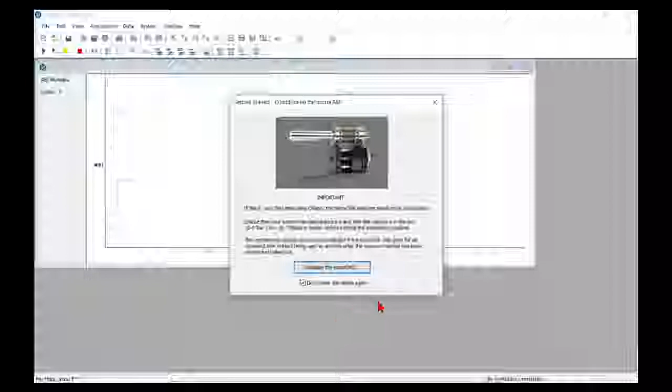We can simply select this here and say don't show this again after it first turns on. But what it does is it stresses the importance of doing the initial outgassing and conditioning of the electron gun. So we'll turn this off. Okay, close this down. Now I have to exit the program again.

So step one, I will turn on the MicroCMA controller, wait a couple seconds for Windows to find it, and then double-click again CMapp to open the program. This time we didn't get that message, so that means that the controller is talking to the software. Okay, so that's the initial turn on.

Okay, now depending on which version of controller you have, you may have to set the emission offset. And so to do that, we open up the hardware properties dialog box and see the emission current offset here is set to 0 microamps. Okay, for this controller, that's correct. For other controllers, that value might be 0.75 microamps or 0.65 initially.

But here's what we want to do. So I've got this set to 0. I'll say OK. I open up the electron gun dialog box, turn my beam on to 2 kV, turn the filament on, and you see this microamps here and how that drops down? That's the leakage current on the high voltage module, and it takes a few seconds to stabilize. And so it looks like I have a little bit of an offset of 0.0015, 0.0014. So it's just slightly above 0.

So what I could do in this case is I could shut this down, come back over here, and set my offset to 0.0014. Okay, now let's turn on to 2 kV, filament on, watch this drop down, and now see that's closer to 0.

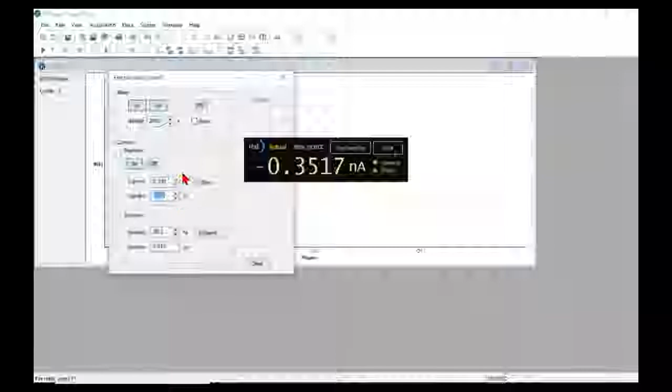Also, here's another little thing we'll set up right now as long as we're here. I'm going to go ahead and drop the filament current down a little bit to where we don't quite have any emission. So now I don't have any target current. See, that's dropped off to pretty much nothing. That's 0.747. So let's put the standby at, I'll say 0.75. Yeah, that's pretty good. Okay, so that's right on the edge of where it starts to emit.

So now see if I take this back up to about 0.9 or so. Here's our current. If I go standby, current goes down. Also turn the beam voltage off. Go turn that off. Now it'll go from the standby back up to 0.9 amps, and the current should come up in a few seconds as well. Oh, I see. Let's drop this down. There we go.

Now, as long as we're on this menu here, another thing we can do is once we find the optimum point for the Wehnelt at 2 kV, so if I lower this down, see my target current is dropping. If I increase a little bit, target current's coming up a little bit till it peaks out right about there. Now I hit set point. It says set the 2 kV Wehnelt to the value I have right now, and I'll say yes. So that means that at 2 kV, the Wehnelt percentage will be 38.4, and that should be the correct value to give us the maximum current density.

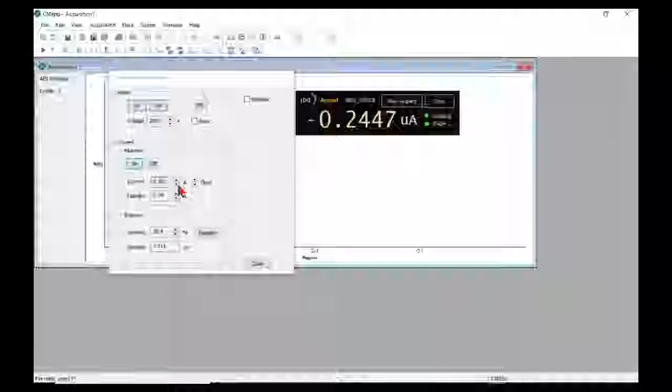Okay, so what we've learned really is that we want to set this current to about 0.9. Let's use the fine here, get it up. I'll say 0.9. Okay, so let's remember that, 0.9. So we'll go ahead and turn off the beam, turn off the filament, close, and stop sampling.

This section of the video, we're going to talk about the conditioning. So we'll go here under System, Conditioning, and these three dialog boxes, what they do is they deal with ramping the filament up, ramping the beam voltage up, and ramping the multiplier voltage up. And so remember that value that we set to, it's already set here at 0.9. We found that that turn-on value was 0.9 amps. That's about where we want to operate.

And so here I can initially set the filament to turn on starting at 0 and going up to 0.9 amps over 20 minutes. Let's raise that up to, if this is your initial outgassing, you're going to want to go 30 to 60 minutes. Bring it up more slowly. Let's say 30 minutes, okay?

That's fine. Now let's say, for example, if I wanted to change this value, let's say it wasn't 0.9. In order to change that, see it's still grayed out? I can't change that unless I first turn this filament off up here. Now I can change that. So let's say if this was down at 0.888 and I want to take it up to 0.9, bring it up to 0.9, say filament on.

Okay, filament on here. Now the beam voltage, you can start it at 0 if you want to, but 500 volts is really quite low. So I'll start at 500, and then we'll go all the way up to 3,000 volts. And then we're going to take this up, especially if it's an initial outgassing, after you've baked out and you've installed the thing for the first time. This is your first conditioning. You're going to want to give it some time. So I'd go a minimum of 120 minutes, but even 180 minutes.

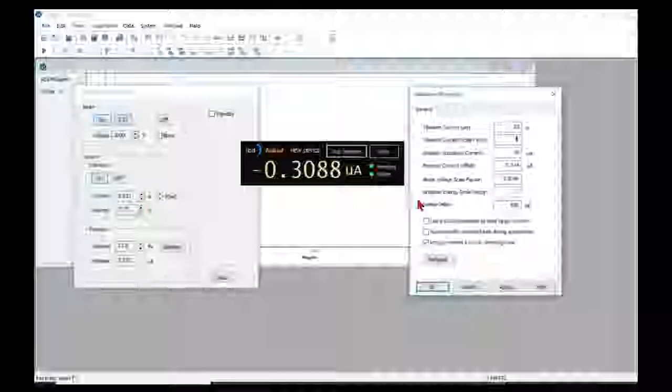So initially I'm going to set it to 0.93 in this case. That way if I accidentally run this thing up too high, I'm not paying attention and get distracted, or sometimes the mouse just runs away from you, we're not going to go way too high to where we damage the filament. Let's run this up that high and see how much filament current it gets us. Oh, I have to apply that first. This should stop at 0.93 now, and it does.

And see, that gives us about half a microamp, so that's not a whole lot of current, so that's relatively safe. If you wanted to go higher, get a microamp, you'd have to bump up the current limit a little bit, but we recommend operating the gun at about 300 nanoamps of target current. That gives you a good value where you're not causing too much heat damage to your sample, which can cause carbon desorption and adsorption effects, and also reduces the chance of arcing because you don't have a lot of outgassing happening in the electron gun region. But you can run it up to a microamp or even a couple of microamps if you want to.

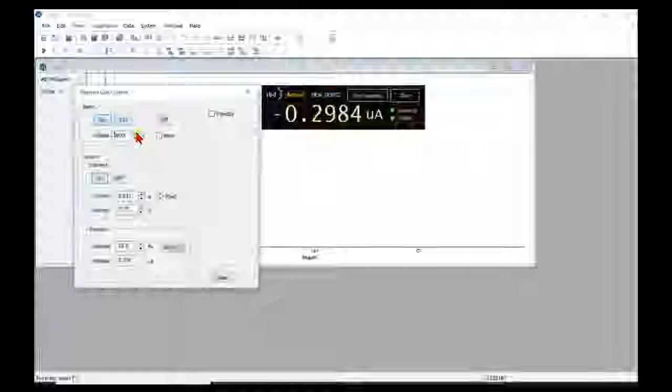Okay, so there we go. That's pretty stable. So that's basically setting the filament current. Now, as long as we're here, I'm going to show you how to optimize the Wehnelt. We did it here. I'll hit that set point again. It says yes for 2 kV. Now, since this gun has already been conditioned, we can run it up pretty quickly to 3 kV. Okay. Now, see, the current is actually a little higher.

Let's adjust our Wehnelt here to maximize it. Oh, that's nanoamps. Okay, I've got to come down. I was looking at picoamps and thinking it was nanoamps. Let's drop down. See, I'm bringing the Wehnelt down. See, now we're up to about 250, 260, 270 nanoamps, 280. Now I'm going to just keep clicking this a little bit until it peaks out. It should peak out fairly close to the 300 nanoamps that we had at 2 kV. Okay, there it is.

Okay, see how I did that? So now I've got that optimized. I hit set point. It says change it to 3 kV set point to this value. Yes. Okay, now if I go to 2 kV, we should have about 300 nanoamps.

And if I run up to 3 kV, all the way up, you see how that's staying nice and stable at 300 nanoamps? Oops, gotta hit it. There we go. So what we've done is we've just set the slope of the Wehnelt voltage so that now no matter what voltage you select, we're always going to have maximum current density and smallest spot size to the sample. All right, that is called setting the Wehnelt slope. Turn this off, stop this.

Boom. See what happened? We went over 5. It said the emission reading was over the limit, so what it did is it shut down the beam voltage and current circuits. It shut it off, and we don't have any current over here. So that's another level of safety where you can set the emission current limit so that, and see, it automatically shut everything off.

So let's go back to our dialog box here, and since that's really just an upper limit, okay, I'm going to set this back to the 0.93 that we had it set to. I'm going to put my emission current limit up pretty high, like 19. Okay. And apply. Okay. Come back, turn our beam on.

Filament on. Measure the current. Target current, that is. Bring up the filament current. Okay, slow down a little bit here. And there we are, coming back up, and it'll stabilize fairly quickly to that 300 nanoamp value. Okay, so that is setting the emission current limit.

Okay, so for this section, we're going to calibrate the elastic peak position and also the energy linearity. So I have a piece of copper loaded in. I've been running this gun, letting it warm up for a little bit, so now you can see up here I'm dropping it down to about 300 nanoamps of current. Okay, stop sampling. So this little alignment icon over here is for the elastic peak, or you can also go over here and go Acquisition. Technique is AES, of course.

Oh, we'd have to go File, New to get that to open up. New alignment. Okay. Acquisition. New alignment. We can get to it here as well. All right. So that's one way to get to it. I like to also just hit this little icon up here, New alignment. So we hit the green Start, which will go ahead and set things up. It'll automatically ramp the multiplier voltage.

And I've got the sample position about 3 or 4 millimeters away from the CMA and sample distance. So now I'm going to walk over here and adjust my Z translator. And you notice I'm not at 60. At this point, I don't care where it's coming in at. I just want to try to find the maximum counts.

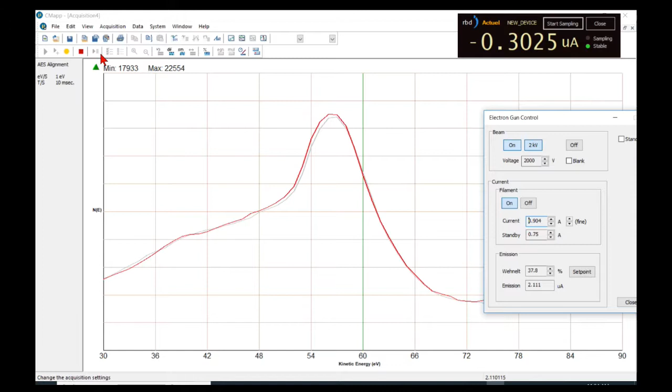So on the front panel of the controller, I'm going to unlock the offset knob and I'm going to move that pot a little bit, and it's very sensitive. So what I'm going to try to do is find a spot. That's pretty good. Lock that down. Okay, when I locked it down, it moved a little bit. Let me go ahead and differentiate just to see where that peak is. That's pretty good, pretty close to 60. Okay, let's stop this.

Okay, that's a pretty good initial value, but really what we want to do is set this with the beam at 3 kV to get more of the higher energy. So I'm going to run this up to 3 kV, my beam voltage, and let's check that again. So hit the little green go button, hit the yellow button, then it'll save it. Oops, I didn't want to do that, I just wanted to stop it. Okay, smooth and differentiate. Okay, that's pretty good.

Now we're going to change the parameters. So we want to look at the 920 peak differentiated. So for there I'll go from 900 to 940. All right, acquire. Now for this high peak, we're going to adjust the gain pot on the front panel of the MicroCMA controller. And for this I want it to come in about 916, 917, something like that.

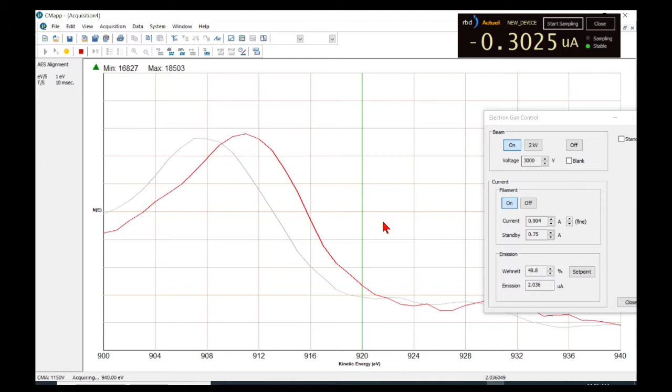Okay, that's low. So I'm going to loosen that and I'm going to turn this a little bit counterclockwise. All right, let's differentiate the data and see where that peak comes in at. That's pretty good. Okay, so I'll lock down the front panel pot. Okay, so now we've set those two peaks. We've got the low-end peak and the high-end peak set.

We'll come back to our settings, and I'm going to go back to the 2 kV elastic peak settings and acquire the elastic peak again. Now, if the peak is not exactly at 2,000 volts, we're going to adjust the beam voltage reference to set this to come in. Oh, this is a common mistake, so I'm glad I did this. So let me stop this thing here. If I'm going to do the elastic peak, I've got to set the beam to 2 kV first. Okay, now reacquire. So if you see that slope during an elastic peak going up like that, that means your beam is at 3 kV.

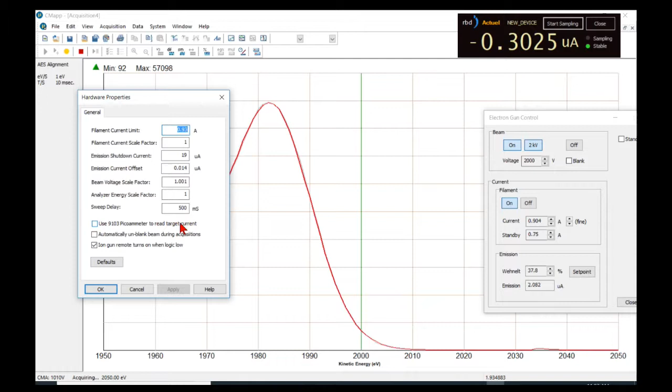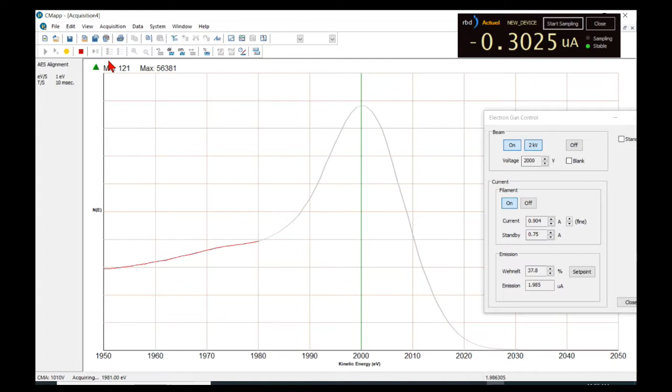Okay, that's pretty good. All right, so now we're going to go ahead and say OK to save that. Yes. All right, now what we should see is we can go ahead and stop the alignment. If I hit the red button, that means I don't want to save it. If you hit the yellow button, that means yes, I want to save the data.

Let's do a survey. 30 to 1030 eV. You don't want to start at 0 because there's so much low energy down there, it's going to skew the scale. So never go really below 30 eV. You're not going to get any useful data by going below 30. And so we set the upper limit to 1030 just so that it's even increments. 10 sweeps, 25 milliseconds. This is pretty typical.

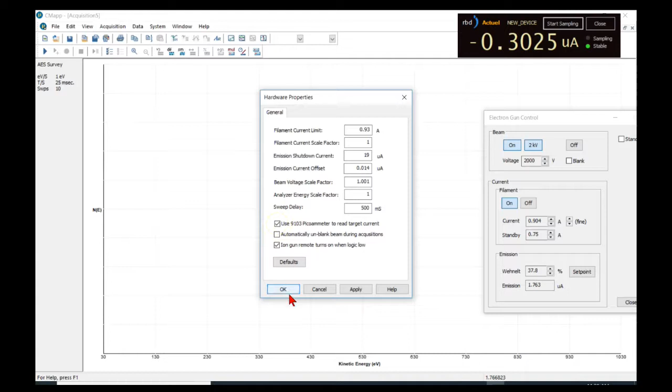Before I do this, as long as we have Actuel set up here, there's another feature we can set here. I'll go ahead and apply this. Here it says use the 9103 to read target current. So I'll say OK, apply, OK, close that down. Let's sample for a second here, just make sure. Yeah, it's pretty good. It's pretty stable. Drop it down just a tad.

Stop sampling. Okay, now when I do my survey, hit acquire the survey, it will start out initially and watch what happens up here. It's going to go ahead and turn it on and off automatically. There. So the CMapp program went out and talked to the Actuel program and said, hey, what's my beam current? And so it recorded that. It won't display it here, but when it gets done with the end of the sweep, it's going to display the current. So that's a useful feature if you want to save the current when you're taking data. And it's very important when you're comparing one sample to another to have the same current conditions.

Let's go back to the hardware while this is running. And so current, scale factor, oh yeah, I was going to show you this. If you turn this off, if you're not measuring with the 9103, you can still manually type in the current that you took the data at.

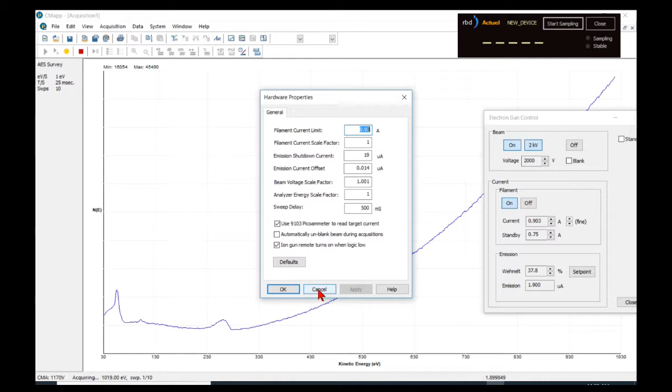Okay, so now you see I'm taking this data with the beam at 2 kV. Normally, you don't want to take 2 kV. 2 kV would be useful if you're having a charging sample or something, but you always want to take survey data at 3 kV. So you see how big this peak is here, the upper end peak. As a general rule of thumb, you want to have your beam voltage be 3 times higher than the energy that you're scanning. And that's why with the MicroCMA, we have a 3 kV coaxial gun, so the typical range is 30 to 1030. You can scan up higher to higher peaks, but realistically, if you get up to like 1500, those peaks aren't going to be as large.

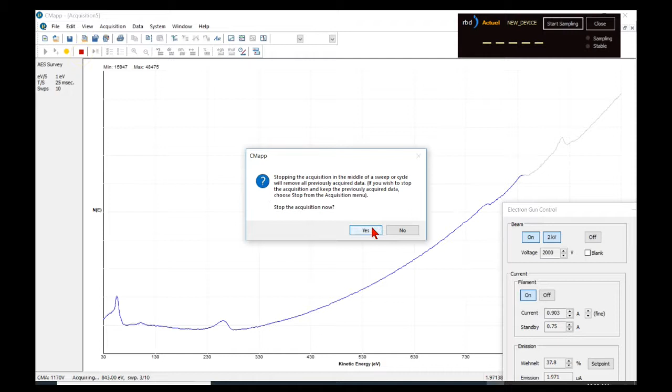So what I'm going to do is stop this right here. Say stop, yes. I'm going to run my beam back up to 3 kV. Okay. Now let's go ahead and acquire. So at 3 kV, that upper energy peak is going to be much higher because my beam is now higher. It was only 2 times higher than that peak when I had the beam voltage at 2 kV. With the beam voltage at 3 kV, that peak's going to come up. So this is the low energy peaks, some carbon.

Now, one of the reasons we select 10 sweeps and 25 milliseconds per point is you can see that you have some noise here, and then for each sweep that you take, that noise is going to go down. So sweep 1, you can see the peaks there, but there's noise. And so by the time you get up to 10 sweeps, that's going to smooth the noise out quite a bit.

The other thing that you notice is that there's a lot of dead space when you take a survey like this. So there are no peaks here, there are no peaks all the way up through here. These are all copper peaks. That's a copper peak, nothing up here. And so in that case, what you'd like to do is take a multiplex. Because with the multiplex, you can take a scan and you can look at just this high energy copper peak here and just the carbon, for example. So you're not wasting all that acquisition time taking data where there's no data. The handbook data, of course, is usually taken over a survey. So if you're going to want to compare something, you'll do a survey.

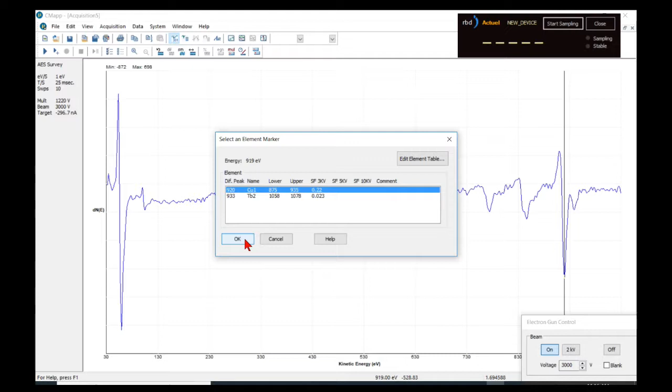All right, so now I'm going to smooth the data, differentiate the data, and show you what the marker does. If I slide the marker out here, what you're looking at is down here, at the bottom of the peak where that line intersects. It pulls up the element table and finds the closest peak to where the marker is, in this case copper, which is correct, and this should be carbon down here.

Okay, and now those are really the only 2 peaks. See, these are all copper peaks, and so now we can do an atomic concentration. Let me turn the marker off up here. This little thing here with the percentage is atomic concentration, and now we can see that the ratio of carbon to copper is about 30% carbon.

So the sensitivity of carbon is much lower basically than, well, I guess it's much higher actually than copper. So here we go. That's our copper, and it shows that the peaks are in the correct position, and we calibrated the elastic peak alignment. So that's setting the elastic peak and also adjusting the linearity on the front panel.

Once those are locked down, you don't have to touch it again. But it's very easy to change that. So anytime if you're not sure it's right, if you check something and you think one of your peaks is off a little bit, it's very easy to readjust that linearity offset and gain.

Okay, in this segment we're going to move over to a different sample. So I'm physically moving my specimen stage over to another sample that I think is silver. So anytime you move your specimen stage or your sample position, you have to take another elastic peak. So I can reuse the same AES alignment, 1950 to 2050. That's our elastic peak. Our beam voltage is at 2 kV. So we'll go ahead and acquire.

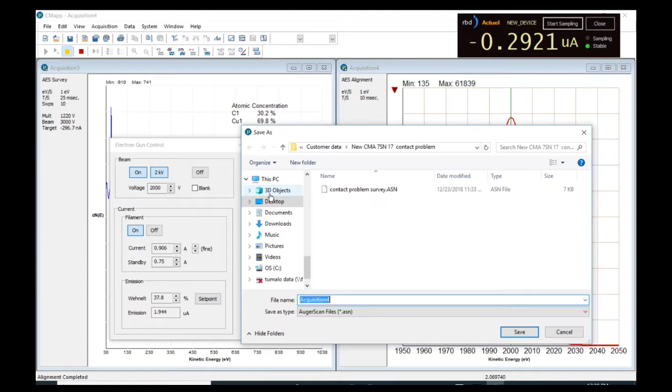You see where this is popping up, this thing that gives me a message that says save. You can set that up under the acquisition options. It says prompt to save after acquiring. If you have that selected, every time you do a survey or any kind of data acquisition, it's going to say save. That reminds you so that you don't overwrite a file and you give it a name. You can also automatically export out to ASCII if you want to.

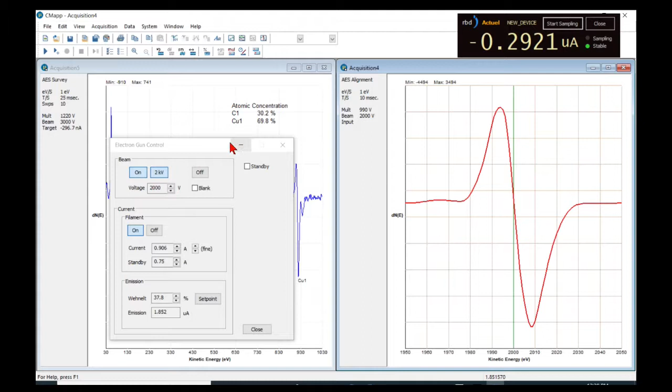Load previous settings for multiplexes and depth profiles. I would recommend that you have that loaded. Okay, so let's differentiate our elastic peak, smooth it. Okay, that looks pretty good. Let's do a survey. So again, we want to do surveys at 3 kV.

So let's start sampling. I just came back from lunch, so I had to turn this back on, and looks like it's starting to stabilize. Okay, let's run our beam voltage up to 3 kV. Okay, stop sampling. Come over here to our survey icon, new survey, and we'll go ahead and acquire.

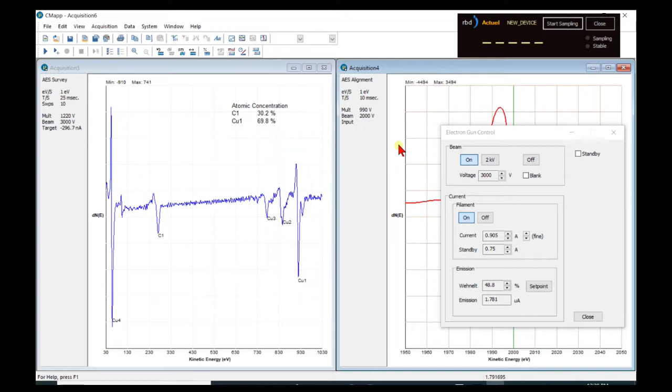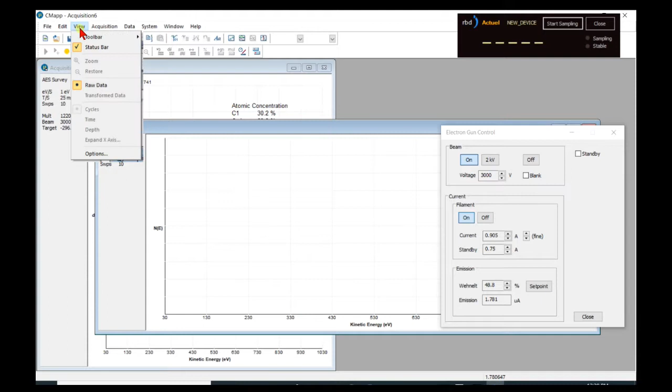I'll minimize the elastic peak and then go window, tile vertically. So here's our copper data. I'll now move the electron gun dialog box over there, and this should be silver. Okay, that looks like silver. So we'll get a few sweeps of this, and we'll just see what this looks like. And then after this is complete, we are going to do a multiplex.

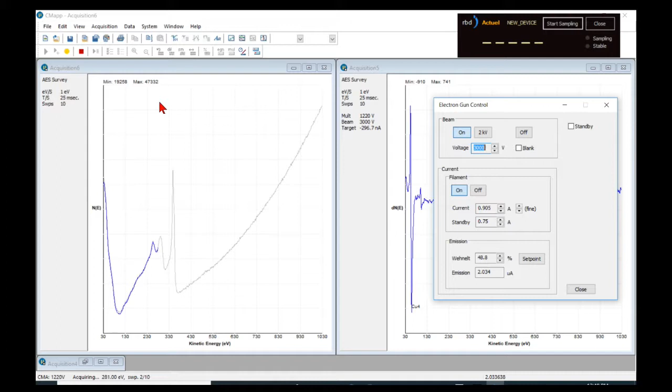You see where the maximum count up here is approximately 50, possibly 55,000, okay, 47 in this case. When the software sets the multiplier voltage automatically, what it will do is try to go to the upper end of the survey, because generally the background rises, and so the highest point of the survey is also going to be the highest point in terms of counts, and then it will set the multiplier voltage to be about 80% of full range, and that gives you a little bit of leeway. 80%, the maximum count is 65K, so therefore 47K is approximately 80% of 65K.

All right, so we can see the sensitivity for silver is very good, and that's why a lot of data is referenced to silver as a sensitivity factor of 1, because it's got a fairly large peak. Okay, we're going to come back to this after the sweep is done.

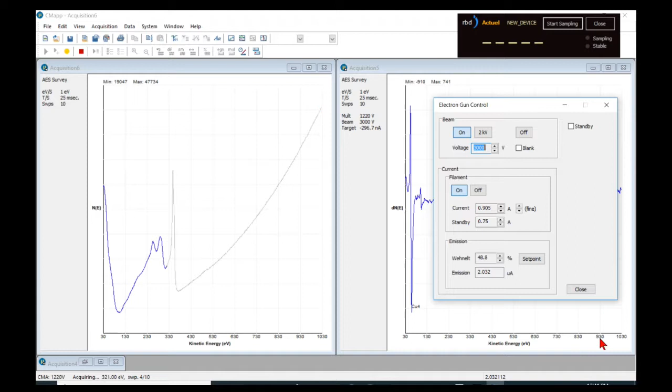Okay, so we're back after having acquired that silver survey, and you can see here, I've already marked it, but it's silver. By the way, if you select the marker track here, it displays the eV and the counts down here, and then that vertical line, if you click on that, the element table pops up, and it will tell you that it thinks it's this because that's the closest peak from the element table. Okay. Element table is located under Edit, Element Table, Auger.

And here's where all the sensitivities are for 3 kV only, and for all the different elements and the defined windows for the multiplex, lower and upper limit, and the sensitivity factors that you can edit. If you want to edit that, you just click on one, edit, and you can change the range, the eV per step, number of sweeps, and all that. That's the default for the multiplex, and here's the sensitivity factor.

Okay, and these are all fresh out of the PHI handbook. They're very similar to... All the CMAs have basically the same sensitivity factors. They're pretty close. I'll say no, I'm not going to save that.

Okay, so speaking of sensitivity, this is taken with about the same current, right? 296.7, 296.5, so very reproducible in terms of current. And you can see that silver, the signal to noise is better because of the sensitivity of the peak. It's got a higher peak.

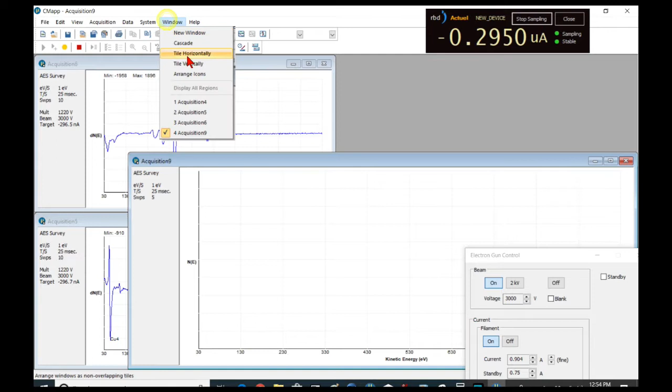Okay, so the elastic peak looks pretty good. We're centered. That's good. We'll stop the elastic peak. Now we want to do a survey. So I'm going to run my beam voltage up to 3 kV. I'm going to do a survey first just to show you. Let's get rid of this window here and do a new survey. And let's just do 5 sweeps so it's faster. Acquire. Window, tile horizontally. Okay, here's our survey.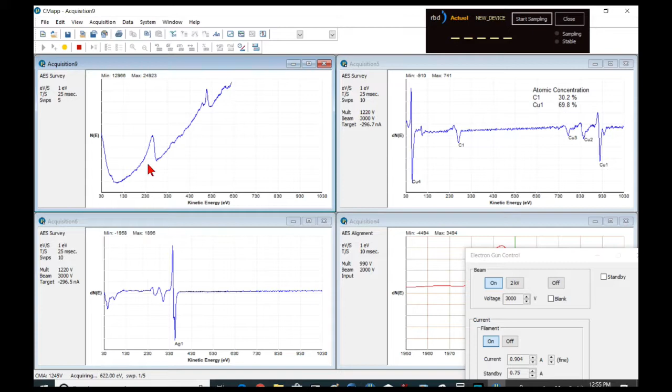So the point I want to make here is that there's going to be a lot of dead space where there's no data, and I expect that if we're on the sample mount it should be iron, so we expect to see some carbon, maybe nitrogen, oxygen, and also iron. Okay, so we can see that here we have carbon, and here's oxygen, and these are the iron peaks.

So the point is that if we look at the noise level here, of course the noise is going to improve with each sweep. So first sweep it's fairly noisy, second sweep the noise will start coming down as it averages out. But you see the height of these peaks out here, these iron peaks, relative to the carbon, they're much smaller. And it looks like we do have nitrogen right here.

While that's acquiring, I'll show you another little trick. My preference for the marker is, like I have it here, where it just marks and then when you click, the box will pop up. You can do it another way here, where you can go Data, Options, Display Marker while tracking. If you turn that on, now when you mark, you move the cursor, you see over on the left-hand side here, all the elements will pop up.

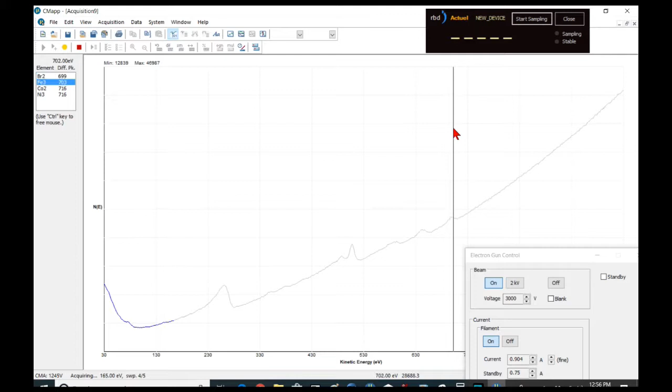And so if I want to go up to this peak and say, okay, I think that that's iron, see they're right next to each other, 702, 703. I know that's iron. This should be iron here. Yeah, it is. See, and this is another iron peak down here. There it is. So we can just confirm that that's iron.

You can set this up and leave it if you want it to be that way. My preference, though, personally, is I don't like that. I just find it too distracting, so I turn that off. All right, so we got one more sweep to go. Well, actually, we can stop this sweep.

I just want to make the point that if we just want to look at carbon, oxygen, and iron, we don't want to be wasting time here and here and here. And actually, that could be nitrogen. Let's see what that is. We'll go back and do it again. Data, Options. I'll turn that on.

Oh, silver. I don't think so, but that's nitrogen. Okay, so here's what we're going to do. We're going to set up a multiplex. So we can do acquisition, new multiplex, or you can also hit this little icon up here, which is new multiplex.

Okay, this is, by the way, loading the previous multiplex that we did. So I'm going to remove that. I want to add carbon, oxygen. I want to add nitrogen, I think I said. Oh, by the way, I can just type N, it will jump us right down to the nitrogen. Okay, add that. And okay, I'll remove that. I didn't want that element. And then, of course, iron. Type Fe, add. And I think Fe2 is the larger peak, so we'll take that one.

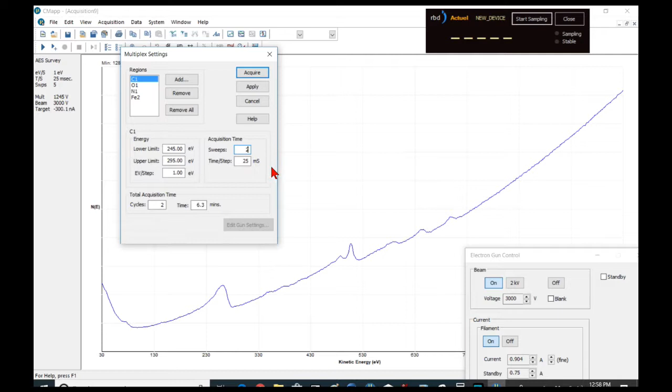Okay, so now what we have here is it tells us how many cycles, and how many sweeps over here, and the eV per step and the range over the peak. So the largest peak is carbon, so let's look at that. Carbon's got 10 sweeps. No, we don't need 10 sweeps. Let's take 2 sweeps on carbon. Okay, oxygen is almost as big as carbon, so let's take 3 sweeps on that.

Nitrogen is really small. This is it here. It's pretty small. Relative to that, it's a small fraction. And so if I went 2 sweeps there, I think I'm going to want to go 30 sweeps at least on nitrogen. And then on iron, relative to carbon, it's about 1/4. So if I went 2, that would be 8. Yeah, let's go 10 sweeps. All right. Number of cycles, 2. So this total time is only going to be about 3.8 minutes.

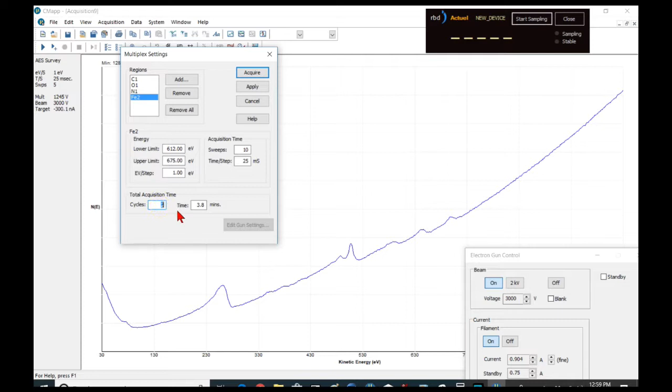So let me do this. That's not bad, just for training purposes. But I'm going to go ahead and set this to 4, because I'm going to stop the video, and then we're going to come back to it. Okay, I'll say apply, then acquire. As soon as it starts acquiring, up here we can see it's measuring the current for us again.

Okay, once that hourglass goes away, there, it automatically opened each window. So this is the first region here. This is carbon. Here's oxygen. Nitrogen. So we can see a little peak here, but as more sweeps go through, that noise is going to go down, and that peak's going to become resolved. Okay, I'm going to pause the video here, and then we're going to come back at the end of this multiplex.

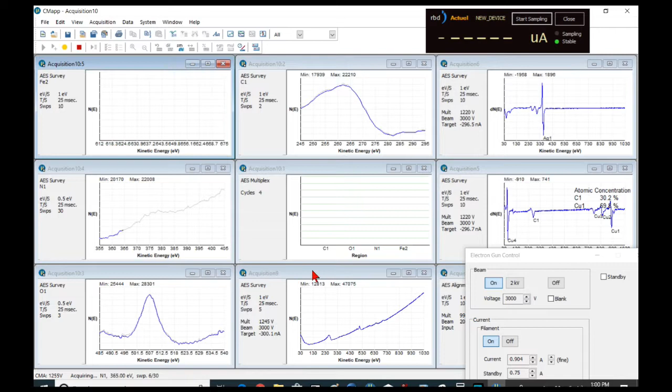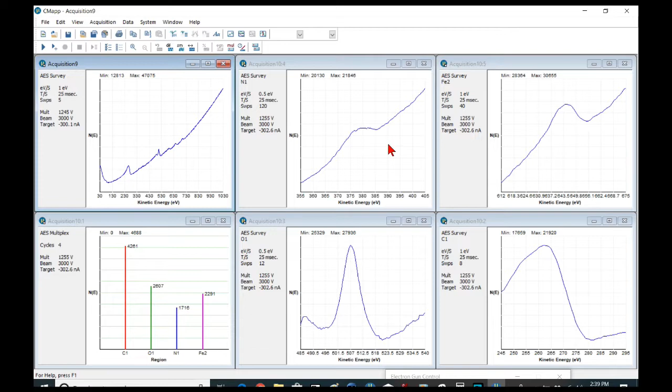Our multiplex has completed its acquisition, and what we're going to look at is some data massage options that we can do here. So I'll get the electron gun all the way down. Remember, this was the original survey that we took, and we can see here with just 5 sweeps that, yeah, we've got carbon. This, by the way, is a low energy iron peak. And carbon, oxygen, iron peaks, somewhat noisy. So what we did then is we took a multiplex where we're scanning just these regions here. Let me move this down, move this one down, go window, tile horizontally.

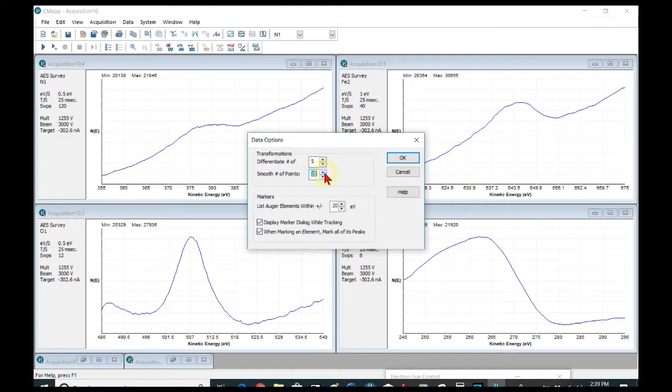Okay, so now we can see the nitrogen, which was barely even visible, after taking a lot of sweeps on it, 120 sweeps. We can see we have a peak. It's pretty good. Now, if I differentiate it, and then smooth, there's still some noise in there, even at that level. So one way you can get around that is let's revert. You can go into data options, and the default for smooth is 5. If I increase that value up to, say, 13, it's going to take an average over 13 points instead of 5. Now I can smooth it, then differentiate it, and see, it's not nearly as noisy.

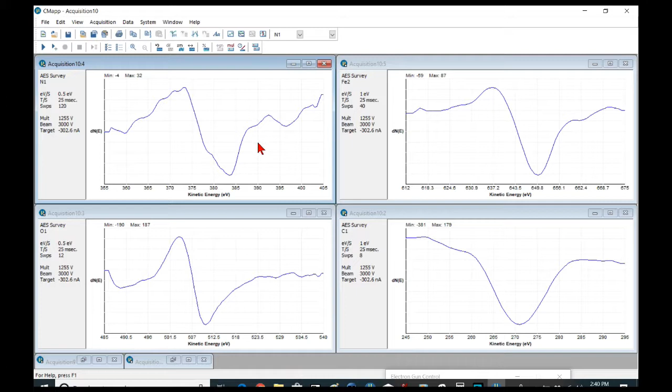The other thing you can do with multiplexes is determine the area of interest for the peaks, and to do that you select endpoints. So if I click from here over to here and let go, this is the maximum value and this is the minimum value to get the peak to peak that it's going to use for the atomic concentration. I can do the same thing on this peak, this peak, and this peak. All right, now let's blow up the other window here. Now that I've selected the endpoints and the data is differentiated, I can do an atomic concentration. And what this gives us is the percentage of those peaks.

So one new feature that we have is that instead of having this bar graph, it's going to display the actual data sets, like here, the actual differentiated peaks, in order starting at low eV to high eV. So it's going to look like a survey, but it's not going to have all the dead space in between. And then this is going to be in a table form at the end. On the last column, it'll say the percentage, similar to what it does for surveys, atomic concentration in a survey. So that's a new feature that's in the works and should be coming out fairly soon.

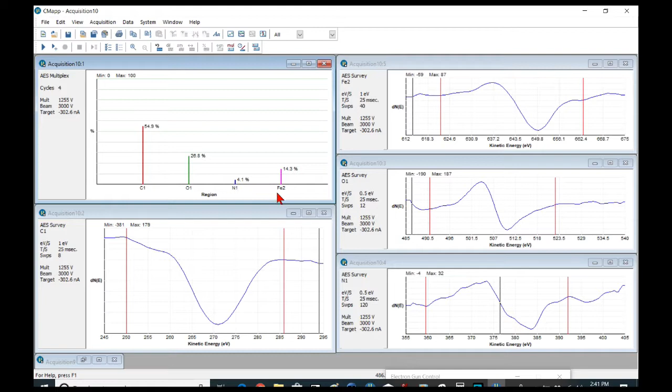But in the meantime, this at least can tell you that, yes, I've got 54.9% carbon and 27% oxygen and 4% nitrogen and 14% iron. And you can then go Edit, Copy as ASCII text, and then you can paste that into Excel if you want to get access to the raw data.

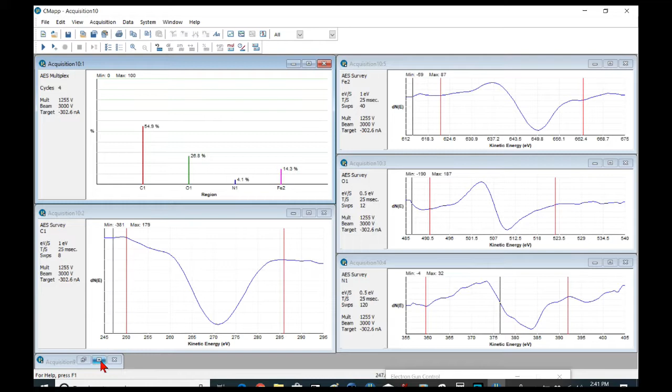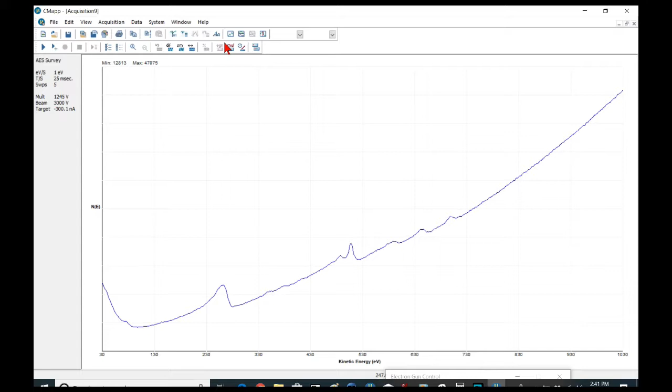So the advantage of a multiplex then is that you don't have to spend a lot of time to get that nitrogen to pull out here. We'd have to take essentially 40 or 50 sweeps. And so instead of doing the entire survey 40 or 50 times, we're acquiring just the areas of interest. Okay, that is multiplex.

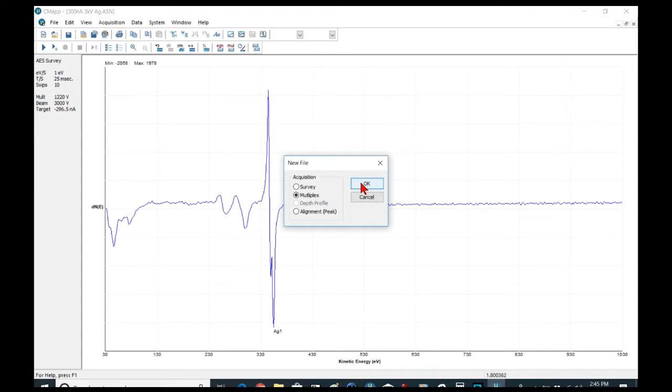Okay, this is going to be an overview of the software, all the software commands in CMapp. We have File New, which would be a new survey, a new multiplex, or a new alignment. Depth profile is coming, it's not quite there. Alignment is elastic peak generally. Survey is a wide scan, multiplex is a series of narrow scans. Open would be opening a previous file.

And of course Close, these are all standard Windows commands. Save, Save As, Send Email. Importing would be actually from our other program, Auger Scan. Export as Text allows you to export the data set as ASCII, and Export All would be selecting multiple files to export at the same time. Print, Print Preview, Print Setup, Page Setup, these are all standard Windows features.

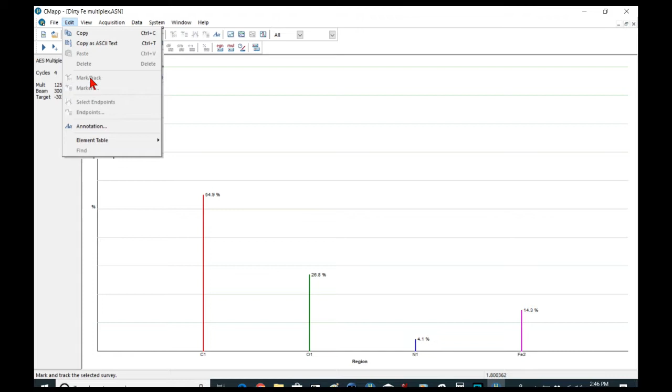Edit Copy copies the image to the clipboard. Copy as ASCII copies the underlying raw data set to the clipboard, so you could paste it directly into Excel. Markers and those are grayed out right now, so let's go back to Window, Tile Horizontally. Let's pick something here, like a survey, for example. See, now Mark and Track are available.

So if I click Mark Track, as I move my cursor left and right down here, it indicates the eV and the count. Over on this side, it's showing us the marker, showing us which peaks it thinks it is. Markers, we've got just one marker picked right here, for example, silver. If we want to add another marker, I'll pick something over here, like sometimes there's a very small amount of sulfur. Don't really see it, but I'll pick it here anyway. Okay.

So now I have two markers, Edit, Markers. If these are highlighted like that, if I wanted to remove it, I would click Remove. If it's checked, that means it's going to be included in the atomic concentration table. Okay, so if I have these two elements, silver and sulfur, I can now do an atomic concentration, and it gives us the percentage of the elements based on peak to peak height divided by the sensitivity factors.

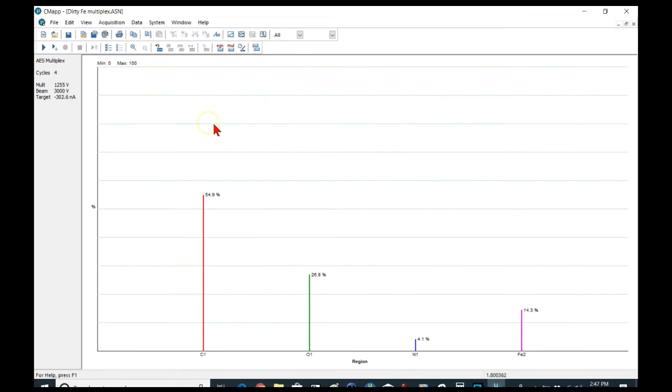Endpoints and Select Endpoints, that's used for multiplexes. So let's look at a multiplex here. Window, Display All Regions. So here we can go Edit, Select Endpoints. If I pick a point and then click on the left mouse and then drag over to the right side and then release, that'll set the window. Whatever's within these two bars here, that's the peak that would be used in the atomic concentration calculation.

So for example, over here, let's look at nitrogen. This is the peak selected here, and it's fairly small at 4.1%. Well, let's say I pick this other peak over here instead, which we know is not right, but it's much smaller. See, now that went down to 0.7%. So back over here, this is the real peak that I want to use. Okay. So that's endpoints. Annotation is if you want to write something on your survey.

This is my data. Okay, then I can click and drag it wherever I want to. If I double click it, I can change the font, the size, the color, the style. Okay, you click it again, you can drag it wherever you want to go. You want to get rid of it, highlight it, just hit delete.

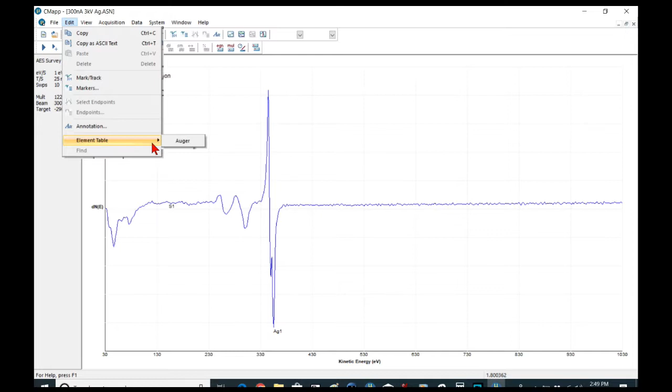Element table, Auger. We only have one voltage, that's 3 kV. And this is where the lower limit, upper limit, and sensitivity factor is stored for the calculation for the atomic concentration. So these are textbook values that are right out of the PHI handbook, and you can use these. They're going to be fairly accurate.

You can dial them in a little bit if you have a standard, and also if you want to create a new, like you have some kind of a film that you made or something, you want to add another type of element combination, you can add those here and then give it a sensitivity factor as well.

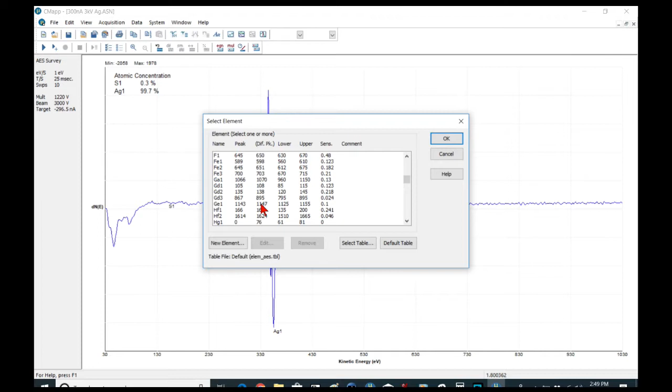So we'll click something like, here's fluorine, for example, edit. This is the range, lower limit, upper. This is the peak, differentiated peak, the range, eV per step, default number of sweeps for a multiplex, and then the sensitivity factor. I'll say no to the changes.

Toolbar. Main, acquisition, and region selection. These are these regions that are all here. These are the toolbars here. Region selection is not shown. Let's go ahead and check that. Now that's interesting. Let me see if that works with a multiplex. View. Nope, that's not available yet for this version. That'll be coming later. It's not really necessary anyway.

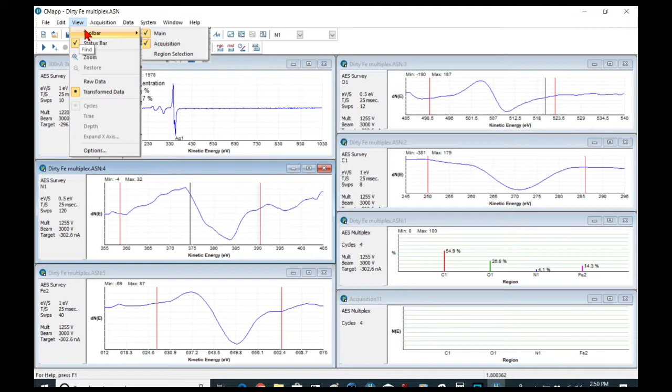Zoom. Click on Zoom, and it allows you to view zoom. Notice the cursor changes to a magnifying glass. Now if I click and drag my left mouse button, when I release it, it zooms in. View, restore, puts it back out.

Raw data or transform data. The data is double buffered. So the raw data is here, and the transform data or massaged data is here. Cycle times, depth, this is all going to be added in for the depth profiles. View options, this is where you can change things like the fonts, the graph, the line style, annotations.

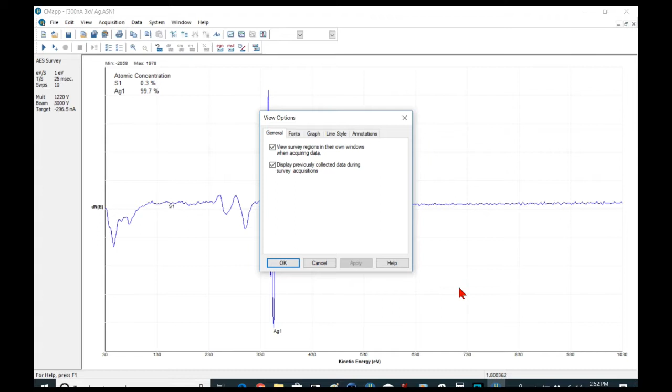General is you want to have the survey regions in their own windows when acquiring data. You want that to be checked. And display previously collected data during survey acquisitions, you want that to be checked as well. That's where you can see the data as gray. While you're acquiring in real time, the previous sweep will show up as gray, so you can see that it's stable. And you can also see the signal to noise improve with each sweep.

Okay, start, acquisition start, that's the same thing as hitting this little green button over here. Stop is the yellow button. If we were actually acquiring something, that would show up as yellow. Stop now is red. That means I don't want to save the data. Continue, you can add some sweeps, for example. If I took some data and I said, geez, I think I want to give it another 10 sweeps just to improve the signal to noise a little bit, you could add that.

Settings, survey settings. These are the settings that we took this survey at. 30, 1030 for the upper eV, 1 eV per step, 10 sweeps, 25 milliseconds. Edit gun settings. This menu is going to change, but basically what it shows us is that we took it at 3,000 volts. And then for the sputter rate calculation for the depth profile, this is where you'll load that information and what your sputter rate is.

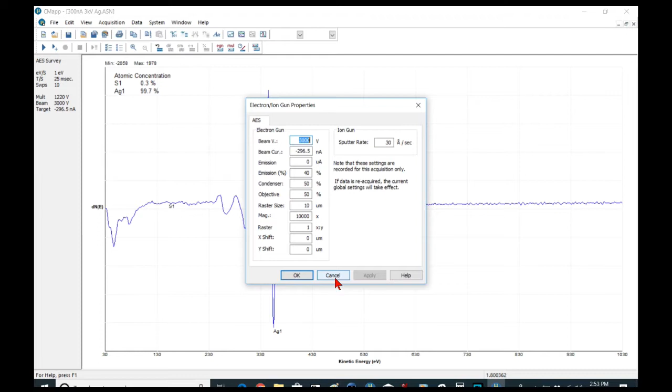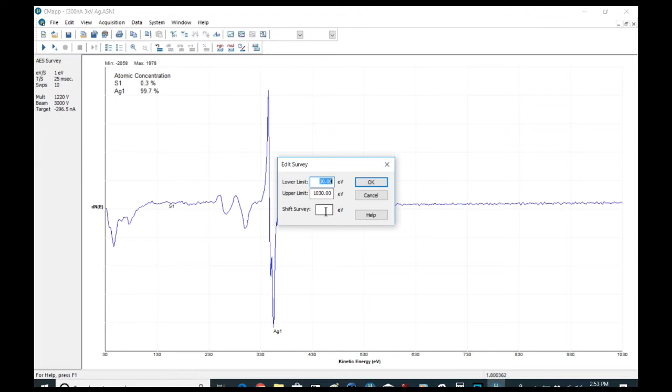A lot of this stuff is for a different electron gun that we've just pulled out of our Auger scan software, and so this is going to get changed to match the CMA. So some of the stuff that doesn't apply is going to go away. Edit. Edit is you can shift the survey a little bit, and you can also reduce it. Like let's say here I don't want to go above, I'll say 430.

Okay, that zooms in like that. Now the thing about edit, you have to be a little bit careful. See, the data is double buffered, so I can't lose it. But if I say revert and go back to raw, see that data, that 430 now, that's my new limit, so that's gone.

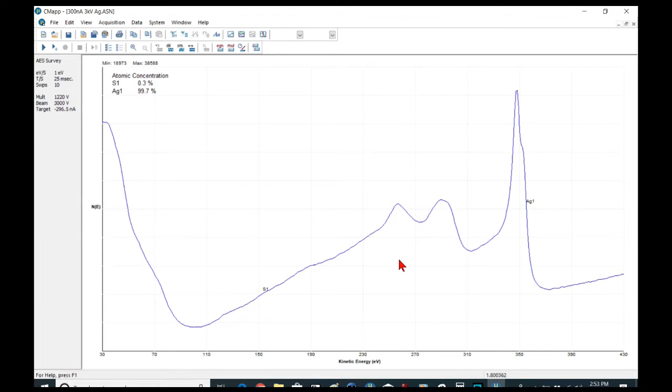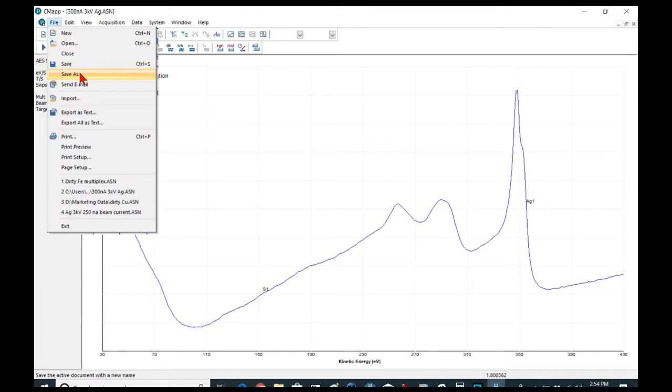But don't panic. So what you could do is I could say, okay, I meant to do this, and I would just simply say File, Save As, and I'll save this as another file name. Or this is what I want to do rather, and I'll just say Save. Or I'll say Save As and save it as another file, in which case my original file is still intact. Or I'll just simply close it, and I won't save the changes.

Now if I go back and open it again, it's right back where it was. So edit, you just need to be a little bit careful of, because that's one thing where you could, in fact, lose some data if you're not careful.

Sample properties, this is really a holdover from a multiple specimen stage, but you could put a comment in here that would show up in the printing. New survey, new multiplex, new alignment. Okay, that's another way that you can go File New or Acquisition New.

Options, prompt to save after acquiring. If you turn that on, I recommend that. Then every time you get done taking a data set, it'll ask for a file name. So that helps you to not overwrite existing data files.

Load previous settings for multiplexes and depth profiles. Yes, we want to do that. You could automatically export as ASCII if you wanted to do that. And all these other things in here. But mostly it's just this prompt to save and load previous settings.

Okay, data, revert to raw. Edit raw data as a text editor, so if you have like a noise spike or something, you can go in there and modify it to clean it up. Differentiate, smooth. See, differentiate is grayed out because it's already differentiated. So we'll revert back to raw. Now data, differentiate. Data, smooth.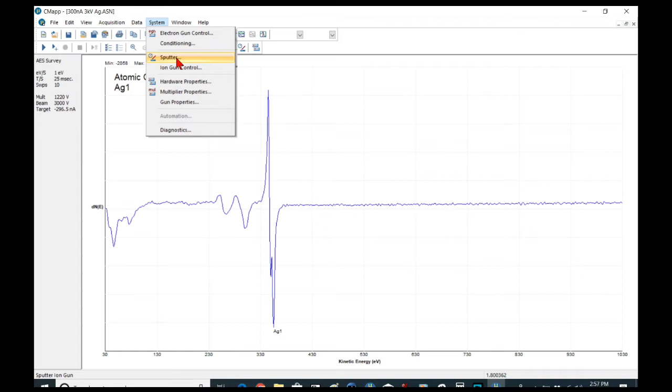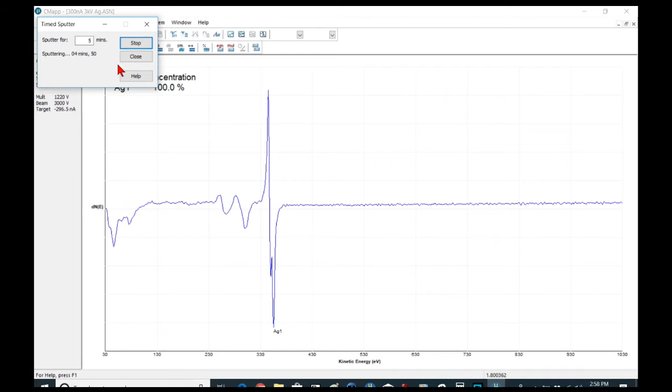Sputter is a time sputter. If you have an ion gun on the system that's tied into the focal point, you could say, okay, give me a 5-minute sputter, start, and then you should see the sputter light. No, there is no sputter light on the controller. But on the back of the controller, there's a TTL BNC, and you can cause that to go either high or low when the ion gun is on.

Okay, so for most applications, though, we're finding that people don't even have ion guns on the systems. A lot of people are just growing films in vacuum and looking at them immediately, or they're heating the samples up and then looking at them immediately. Ion gun control, that should be grayed out.

Hardware properties. Okay, this is where we set things like the filament current limit, scale factor is always 1, emission shutdown, emission current offset, beam voltage scale factor, energy scale factor should always be 1 because we adjust the linearity on the front panel pots.

You can use the 9103 picoammeter to read target current or not. If you don't have that selected, then there's a little box in the survey window when you set up a survey, and you can just type in what the current is there. And let me show you how that works. Let's apply this here and close.

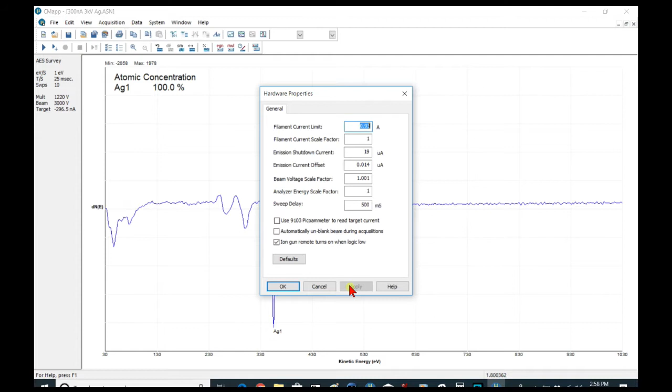If I do a new survey, see this box down here, target current. So you could just manually type in 300 nanoamps, for example, and I can apply that. So if you have a Keithley, you can take that measurement. If you have the 9103, it's going to work automatically. And for some systems, they don't have a picoammeter because you have no way to measure current because your target is grounded all the time.

Multiplier properties, these are the defaults here for how far up the multiplier gets ramped. For alignment, it's 30. It's percent of maximum counts, 30%, 80%, 50, and 50 for profiles and multiplexes. Actually, multiplexes, I think it makes sense, we'll bump that up a little bit higher as well. I'll go up to 80. What's supposed to happen is it's supposed to select that on the highest kinetic energy, so that will reduce the chance of saturation. Default voltage, this is as high as the voltage will go up to, is 1400.

If I turn the auto EMS off, it's going to set the voltage to 1400. So that's useful if you're conditioning or troubleshooting, but in general you're going to want to have the auto EMS selected. If you want to acquire a gain curve, you just see what the multiplier looks like. You set the multiplier voltage, you'd set the beam current down to where you only have about 10 or 20 nanoamps of current, and then you would run the gain curve and you'll see a display of counts versus voltage.

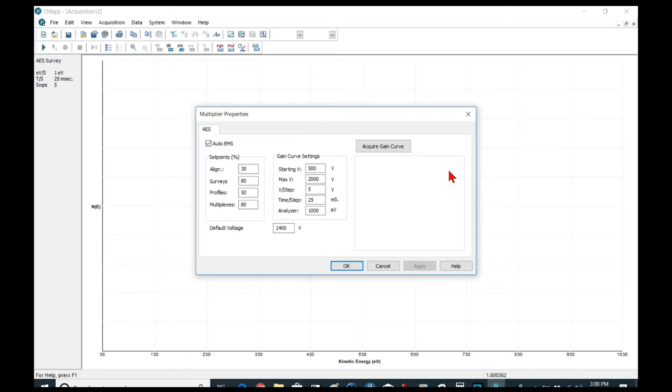Gun properties, same thing. A lot of this stuff doesn't apply. It's mostly just the beam voltage that was set up. In this case, this is the last beam voltage that the electron gun control was set to, and the beam current. And so the emission current didn't show up on here. Emission percentage. So a lot of this entire dialog box is going to be changed in the near future.

In this segment, we're going to talk about how do you determine the correct operating point for the electron gun if you can't measure the target current because your specimen stage is always grounded. The way you do that is you're going to set the multiplier voltage first of all. This auto EMS, we're going to turn that off, and we're going to set the value down to about 1100 volts. 1100 volts is typically the correct voltage for an elastic peak.

Okay, so now we want to go to our electron gun menu, turn it on, the beam voltage, turn on the filament current, slowly bring up our filament current. Remember, you get up to about 0.8 or so, you've got to slow down.

Now, remember that there's a ratio, and typically it's about 10 to 1. It can vary. Depends on the sample and how far away the electron gun is and things like that, but approximately 10 to 1. So that means if I've got 1.3, 1.4 microamps, I probably have about 140, 150 nanoamps of target current.

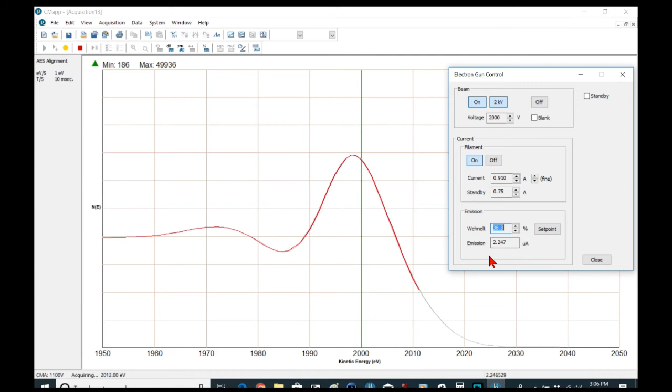Okay, so for an elastic peak, about 1100 is correct, and that gives me about 2.2 microamps, so that means I'm probably about 220, 250 nanoamps of current. 2.2 microamps equals 220 nanoamps approximately. But that's good. I'm not saturating. I could move my sample in and out to set the elastic peak and to get my data.

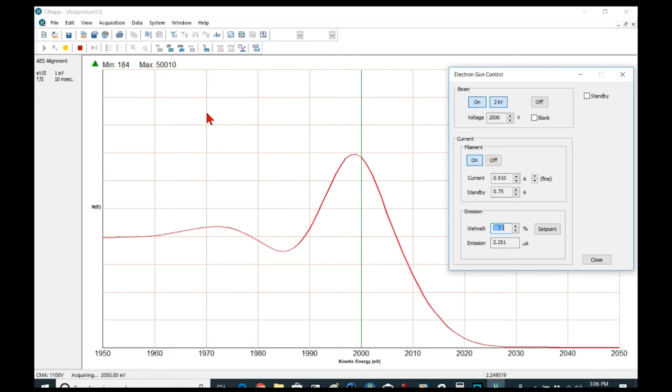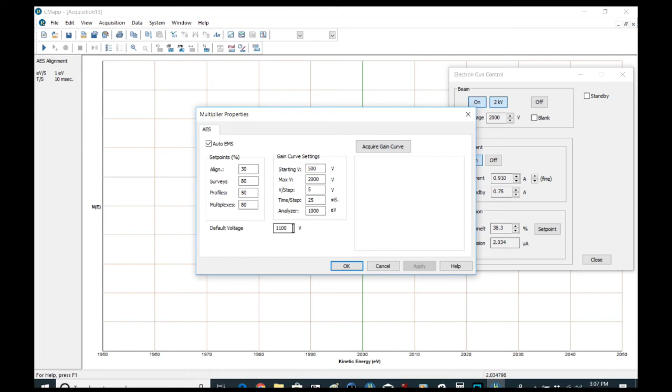Now for a survey, you're going to want to do the same setup, but you're going to want to bump up the multiplier voltage. Actually, that's not true. Now that I've set that, and we think that's about the right setting, I can go back here and turn the auto EMS back on, and I'll set my upper limit to 1400 volts. Now we're going to assume that we have approximately 200 or so nanoamps, and I'm going to go ahead and do a new survey and acquire.

And let's see what it sets the multiplier voltage to. Typically, you're going to be somewhere around 1200, maybe up to 1300 volts for a survey with 300 nanoamps. Okay, so we're pretty close to 1200, 1190. So that tells us that this voltage is probably correct, and that our current is probably in the range of approximately 300 nanoamps or so, which is what we want.

So you're not going to get the same level of reproducibility without being able to measure the target current as if you have a picoammeter. However, this is still a pretty good representation. So if you know about 2.2 microamps, maybe I could go up to 2.5 microamps, for example. So you're going to use this emission current to give you an indirect measurement of the beam current.

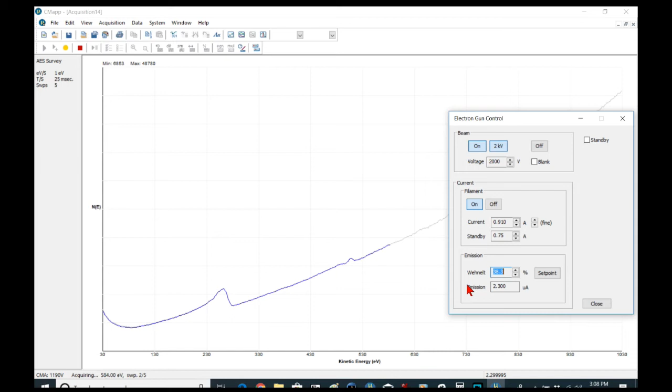And you just want to make sure that you don't increase the beam current too much to where you have issues like saturation of the multiplier or just too much emission. You want to keep your emission below 3 or 4 microamps. All right, so we could take additional sweeps on this, but I'm just going to go ahead and stop that.

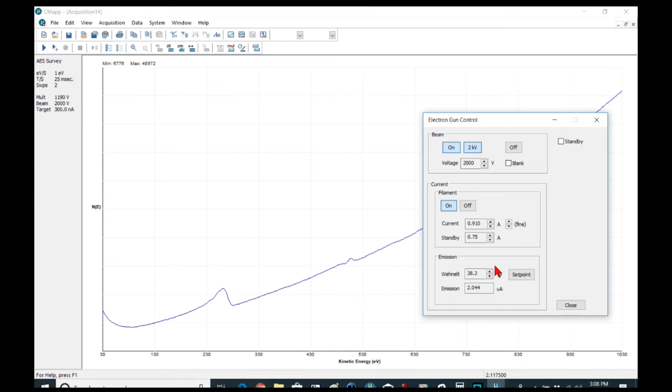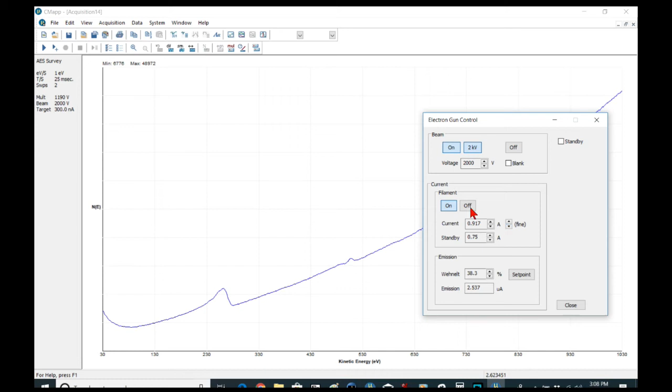All right, so to review then, let's see what happens here if I bump up my current a little bit. About 2.5 microamps. Remember that last survey was about 1190 on the multiplier voltage. Let's acquire it now and see what happens. If I've increased my emission current, that should have also increased my target current, and so now the multiplier voltage should have to be a little bit lower. See, a little bit lower, 1175.

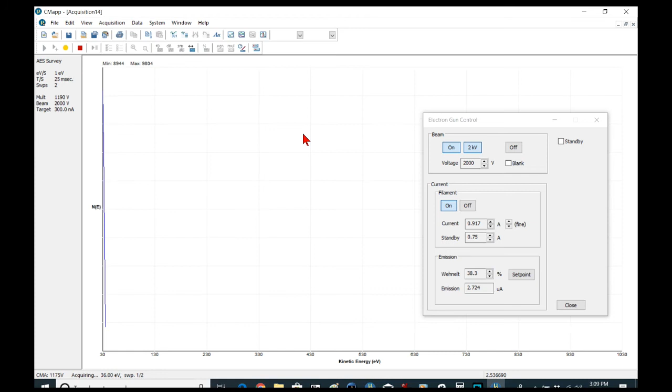On the other hand, let's stop this, if I have less current, way less current, okay, now let's acquire. Now it's going to ramp the multiplier voltage up higher. And if you get up to where you're at 1400 volts and you don't have adequate signal, then that means you need to increase your target current or your emission current. Okay, this is still not too bad. It's 1240 volts. So we probably have approximately 120 or so nanoamps of current.

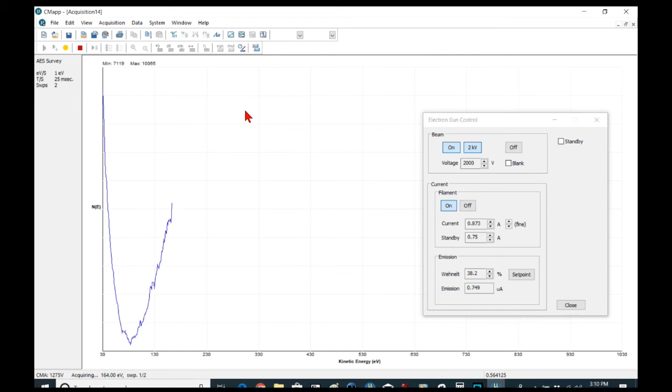Let's drop that down further. Oops. Up here. Filament current. Okay, there we probably have about 50 nanoamps. Now I'd expect that the voltage is going to come up higher. Might be 1300, closer to 1400. Nope, still 1275. It's coming up.

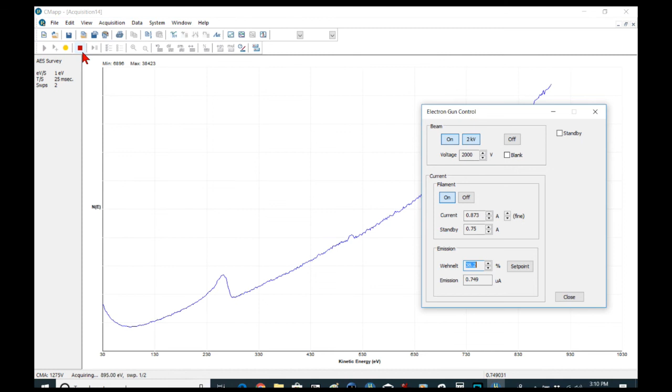But that's the general idea: the higher the voltage, that means you don't have enough current, so you'll still get data, but it's going to take more sweeps because the signal to noise is not going to be as good as it would be with a higher current like 300 nanoamps. 300 nanoamps compared to 50 is quite a bit more, of course, but still 300 nanoamps is not that much target current. Okay, so that's pretty much how that works. Go ahead and stop this acquisition, yes. And that is how you determine the correct operating point without having a picoammeter.